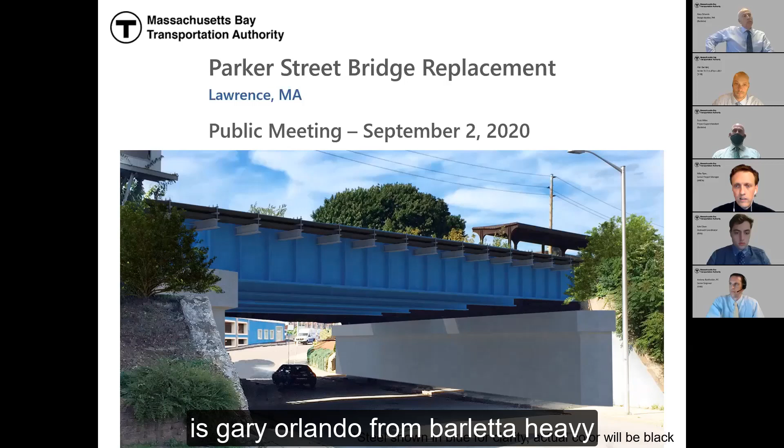Accompanying me as part of this meeting and representing the design build team is Gary Orlando from Barletta Heavy Division, Robert Penfield from VHB, and Andrew Burkholder from VHB, who you'll all hear from.

With that, I'd like to turn it over to Bob Penfield from VHB. Thanks, Mike. I appreciate it.

Right now on the screen that hopefully everyone can see is a slide showing a rough rendering of what the proposed bridge will look like. Just as a point of clarification, the shading of the steel for the bridge, what's called the superstructure, is shaded blue. That's just for clarity, so you can see the contours and intricate pieces of the bridge. But in practice and in actuality, it will be black. That just doesn't show up in the rendering.

As Mike mentioned, there'll be a few of us speaking with you today. Mike Ryan is the MBTA project manager for this project and this program. Gary Orlando is the project manager with Barletta Heavy Division, who is the general contractor constructing this bridge. I'm the design manager with VHB, who is working with Barletta and MBTA as the designer for this project. And then Andrew Burkholder, who's our senior engineer, my counterpart, also at VHB.

So just an outline of what we're going to talk about this afternoon. I'll give you an overview of this design build program. This is one bridge amongst 6 total as part of this program that are being replaced. Then we'll get into some specifics about the Parker Street Bridge, site location, the existing conditions that impacted the design and construction sequencing, the project needs and goals. We'll describe the proposed bridge layout and the design that went into it. We'll talk in detail about the proposed construction staging, and the impacts happening at each phase of construction, and then an overall project schedule. And then we will highlight additional opportunities for public outreach, and take any questions you might have.

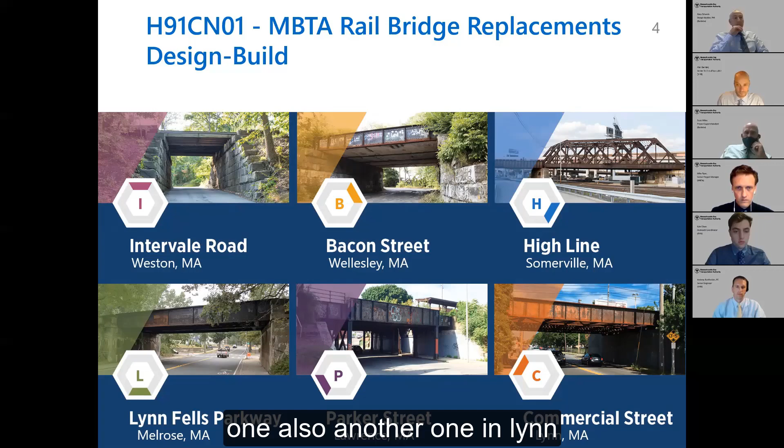The Parker Street Bridge is one project as part of a larger design build program. The MBTA has combined 6 different bridge replacements into a single design build program. We've got a bridge in Weston, Wellesley, one in Somerville, one in Melrose, one in Lawrence, and one in Lynn. They're all located in various locations within the MBTA's commuter rail system. As you can see here, at the top of the page, on the Haverhill line is our Parker Street Bridge, which is what we're here today to talk about.

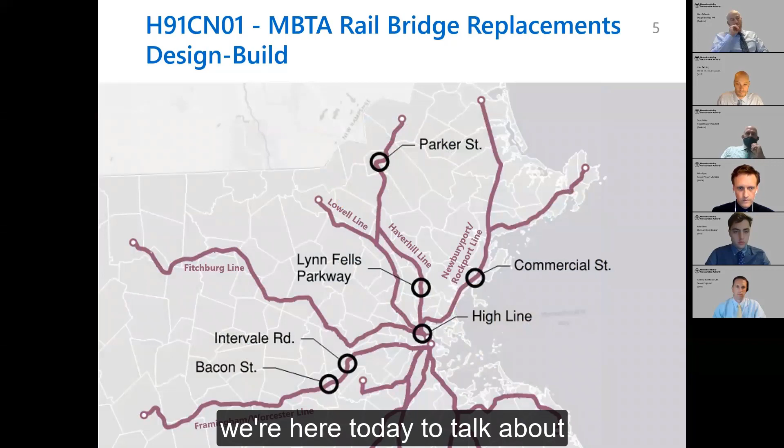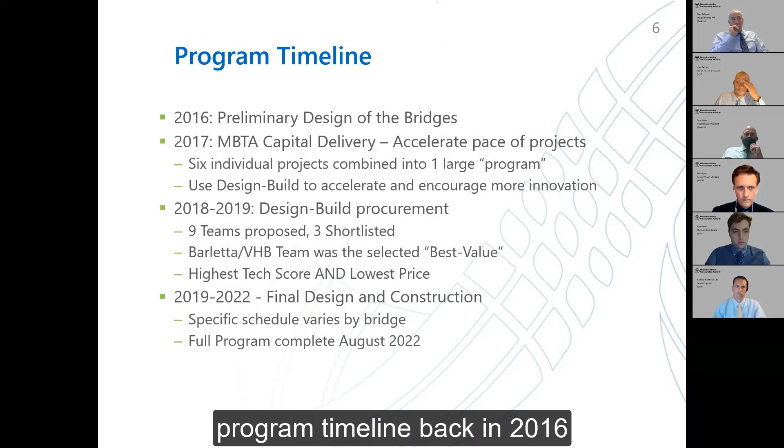To give everyone an idea of the program timeline, back in 2016, the preliminary design of each of these bridges was ongoing. In 2017, the MBTA's Capital Delivery Group was looking to accelerate the pace of their projects and infrastructure improvements. So they decided to take 6 individual projects and combine them into a single large program, and use design build as the contract delivery method to accelerate the project and encourage more innovation. Design build is where a contractor and a designer work together to deliver the project at the same time. During 2018 and 2019 was the procurement for that design build program. 9 teams proposed to win it, 3 were shortlisted, and ultimately the Barletta VHB team was selected as the best value, with the highest tech score and the lowest price.

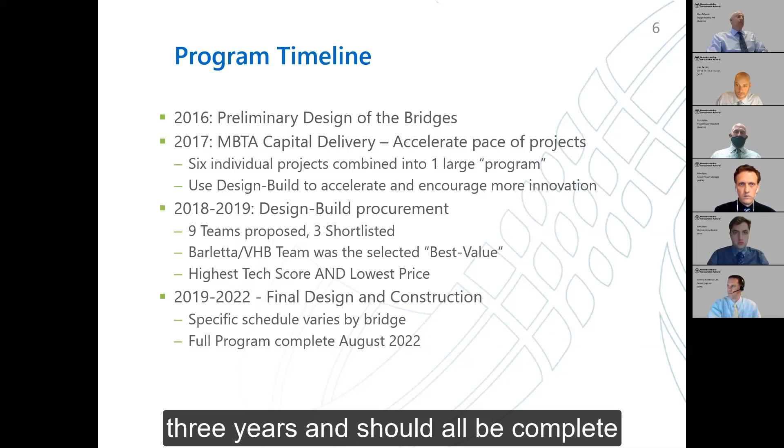From 2019 to 2022 is when we've been progressing the final design and construction for all 6 of these bridges. So while the individual schedule varies for each bridge location, that full program takes approximately 3 years and should all be complete by August of 2022. But we'll get into some more specific details about the schedule for the Parker Street Bridge in just a little while.

So here's a map showing the Parker Street Bridge location relative to the streets of Lawrence. It's carrying the Haverhill line over Parker Street, and it's just south of the Merrimack River.

What we'll do here is zoom in and take a look at some of the existing conditions and site conditions that influence the project.

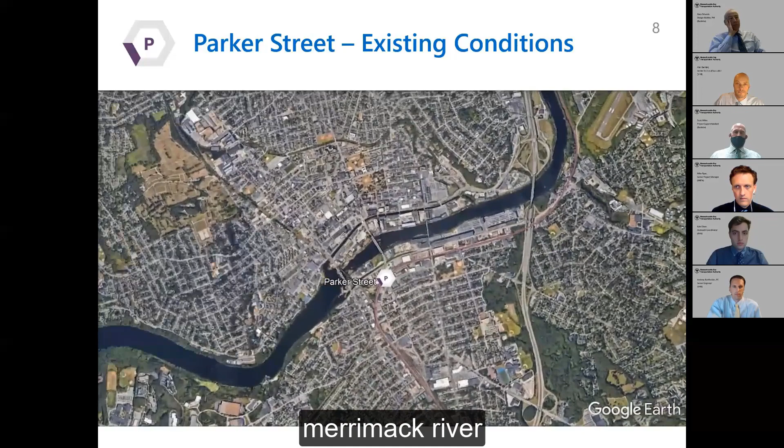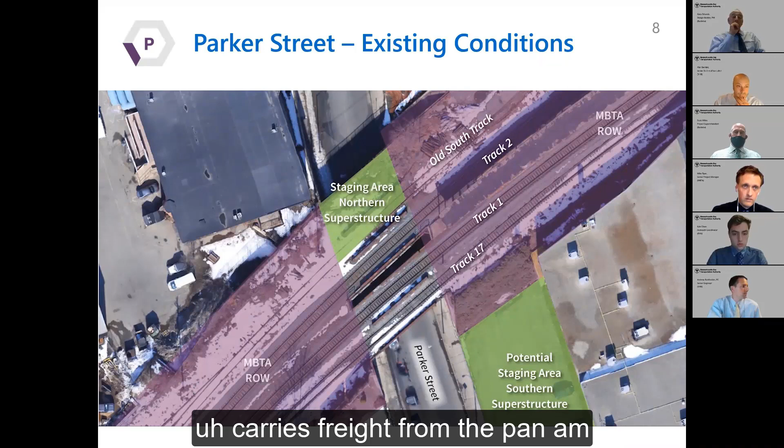Again, we're just south of the Merrimack River. As we zoom in here, you can see the existing bridge, and we've highlighted some different areas. The existing bridge at one point carried 5 different tracks. One has been out of service for quite some time. One is called the Old South track that is no longer being used. Track 1 and Track 2 are the MBTA commuter rail system, and Track 17 carries freight from the Pan Am rail yard just south of this location. You can see the MBTA right-of-way highlighted and shaded in purple, and then we've got areas shaded in green identifying potential staging areas for how we're going to construct the new bridge. We'll get into a lot more detail here in a little bit to clarify all of that.

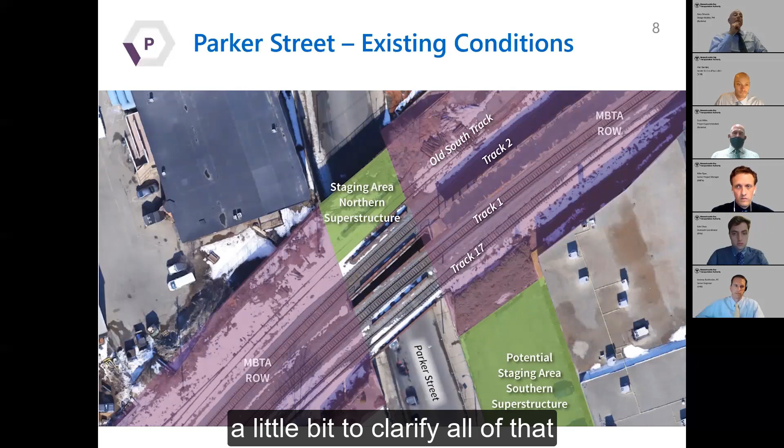At this point, I'm going to turn it over to my counterpart, Andrew Burkholder, who's going to get into some of the more specifics about the bridge.

Thanks, Bob. As Mike mentioned, the bridge was built in 1930. You can see a picture of it here on the right side of the screen. It was originally a 5-track structure, and as Bob mentioned, only 3 of them are active today. The original bridge consisted of a ballasted deck and concrete gravity abutments with a sidewalk on each side. These are approximately 9 feet wide on the west and 7 feet 9 inches on the east. You can also see that these sidewalk widths include the existing piers, the steel columns that exist today in the sidewalk just behind the curb.

Great picture. Utilities on site include signal and fiber optic that are carried by the bridge. Overhead, we have PTC wires, which are positive train control wires, and power is also located on overhead wires above the bridge. The railroad operations include 32 commuter trains that use this bridge on any given weekday, and 12 trains cross the bridge each day of the weekend. There's also freight rail on track 17, as Bob mentioned.

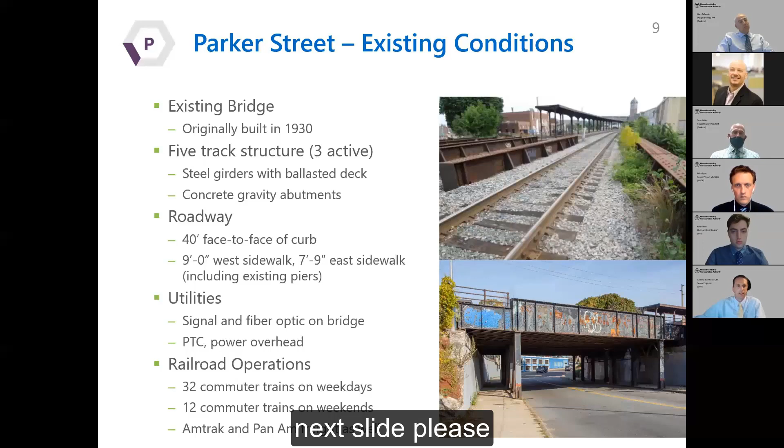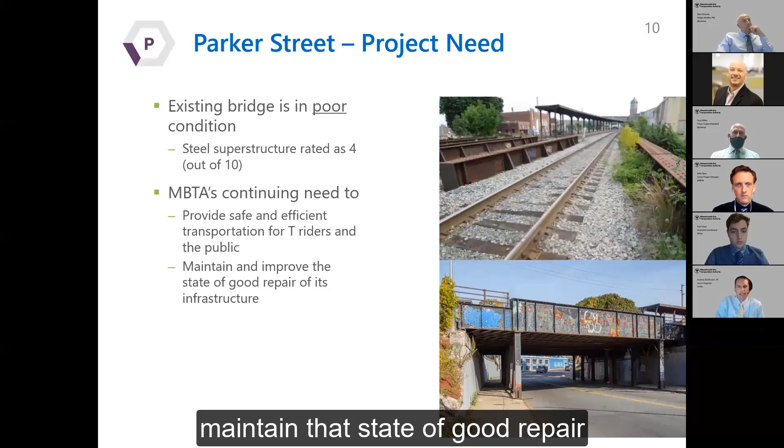So why do we need to do this project? The answer is that the existing bridge is in poor condition. The steel superstructure is rated a 4 out of 10 on the last inspection report. For the MBTA's continuing need to provide a safe and efficient transportation system, we need to replace this bridge to maintain that state of good repair for the T's infrastructure.

So the goals for this project: we want to restore that state of good repair for the T's system. The replacement structure needs to be one that's resilient and provides a minimum of 75 years of expected service life. We want to replace this while minimizing impacts to abutters, the commuter rail riders, users of Parker Street, and also the freight operators in the area.

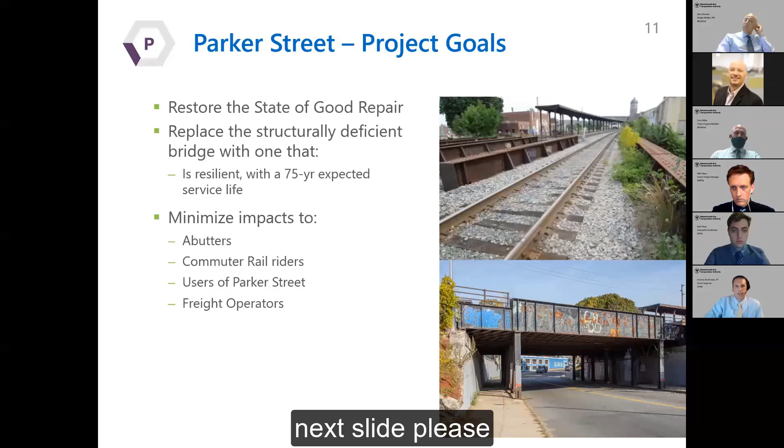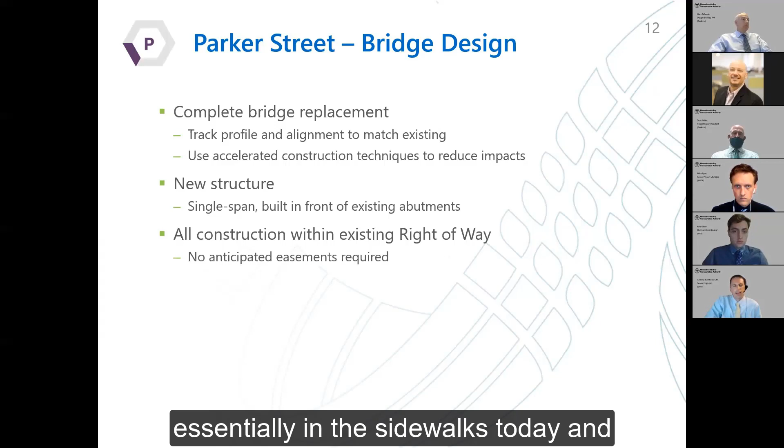So let's get into the design a little bit and show you how we're going to do that. This is a complete bridge replacement. The track profile and alignment for all 4 tracks going back on this bridge will not be changed—same horizontal alignment, we're not raising or lowering anything. We are going to use accelerated bridge construction techniques to achieve that goal of reducing impacts to the traveling public and the abutters in the area. The new structure will be a single span and built in front of the existing abutments, which will make more sense in a minute when I show a graphic. One benefit here is we are getting rid of those steel piers that are essentially in the sidewalks today. And all construction is within the existing right-of-way.

This graphic at the bottom of the screen shows the bridge cut in half, as if you were standing in the middle of Parker Street. A couple things to point out: the existing abutments are shown in the brownish color on each end. We plan to come in front of those abutments and install micropiles—steel round tubes that are drilled down into the ground and into the rock. These will support the new bridge, and you can see them extending at the bottom of the page.

We'll then cast new concrete in front of the existing abutments, and one abutment will have a tieback to resist some longitudinal loads. The vertical clearance that we will provide will be 14 feet 6 inches over Parker Street.

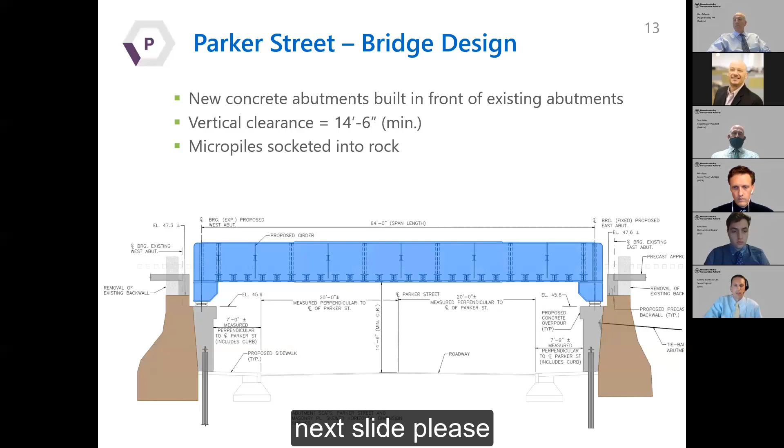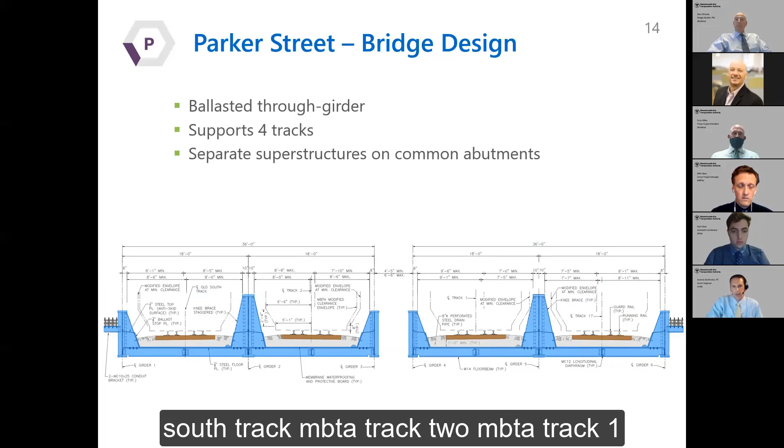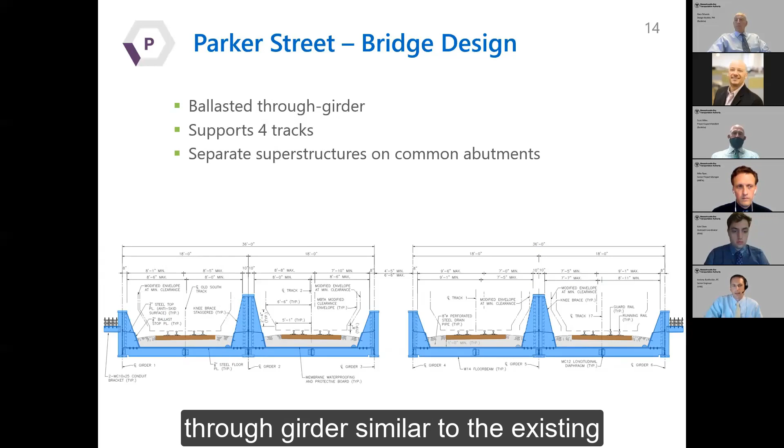The graphic here at the bottom of this slide is if we were standing up at track level, again able to slice the bridge in half. You can see the new structure will support 4 tracks. Moving left to right: the old south track, MBTA track 2, MBTA track 1, and then track 17, the freight track. There are 2 separate steel superstructures, with a common abutment at each end supporting these 4 tracks. The construction will be a ballasted through girder, similar to the existing bridge.

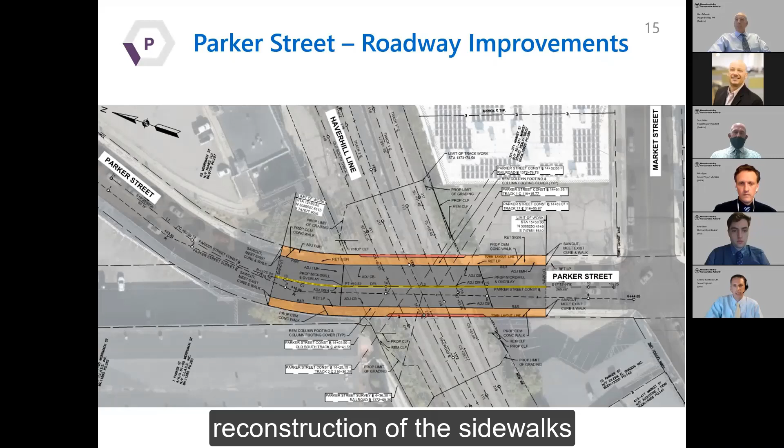This view is an overhead view of the area of Parker Street right below the bridge, intended to show the limits of repaving of Parker Street and reconstruction of the sidewalks as part of this project. The orange shading shows the limits of the reconstructed sidewalk, which coincides with the limits of repaving of Parker Street at the end of the project.

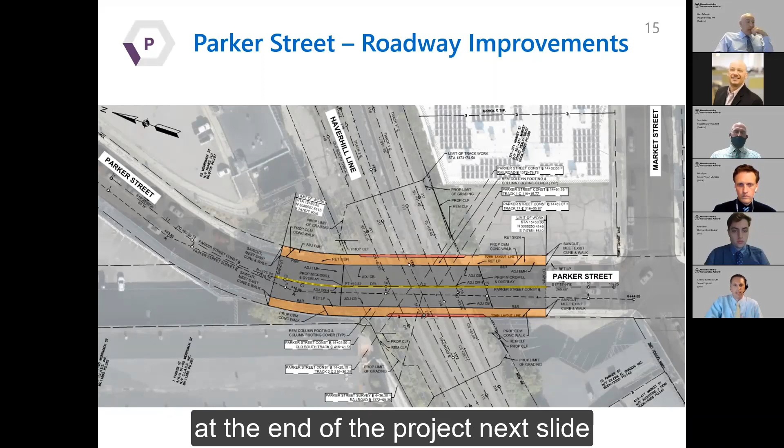Once this work zone is set up, we are able to go beneath the bridge and, using some low headroom equipment, install the tiebacks at the east abutment.

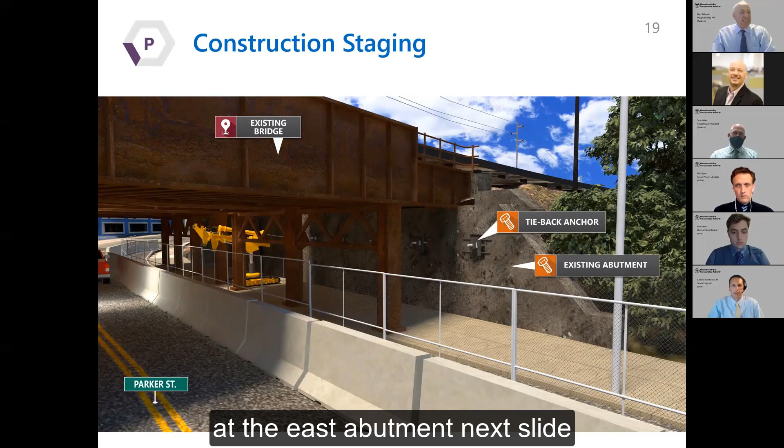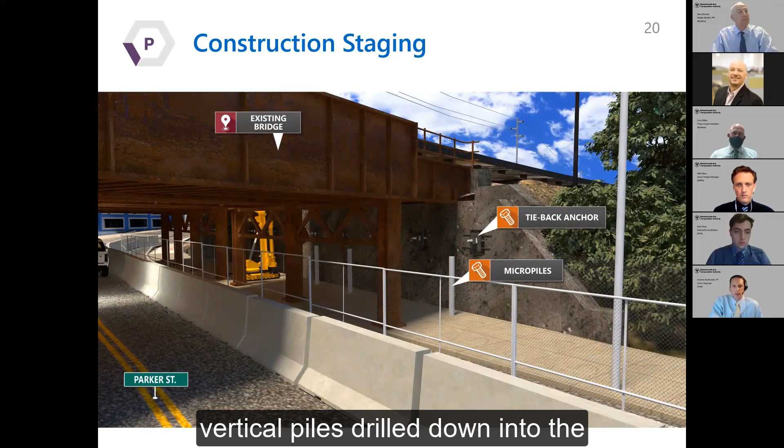The next step is to install the micropiles—the vertical piles drilled down into the rock. The low headroom equipment is able to operate under the existing bridge and install these without disrupting any commuter rail traffic.

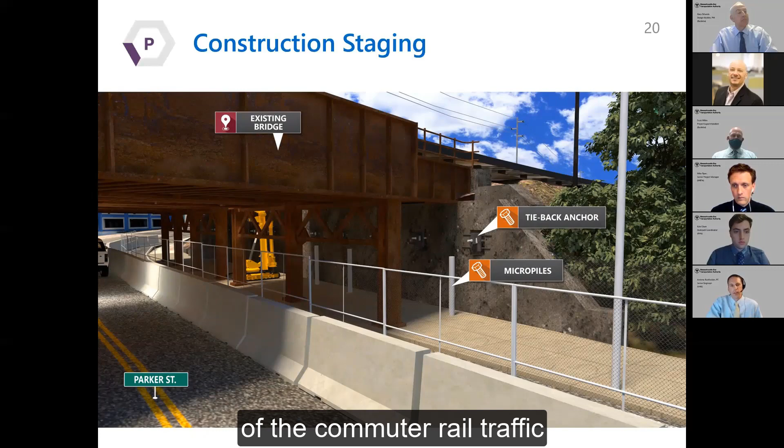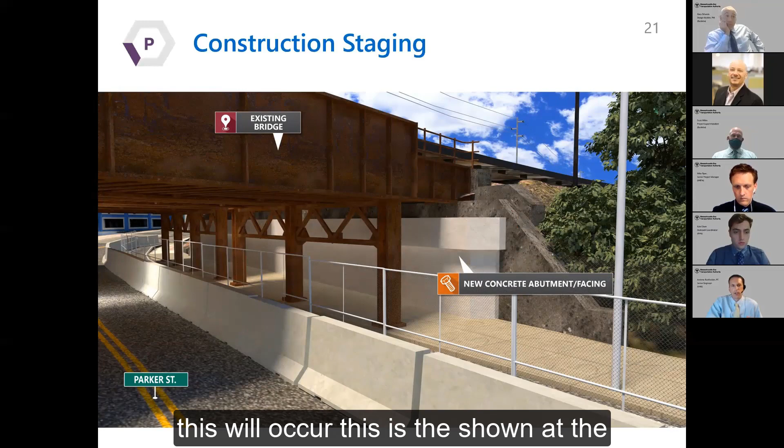The final step at the abutment is to cast the new concrete in front of the existing one. This is shown at the east abutment; the same process, minus the tiebacks, will happen at the west abutment. And now we're back to the overhead view showing that new abutment on each side.

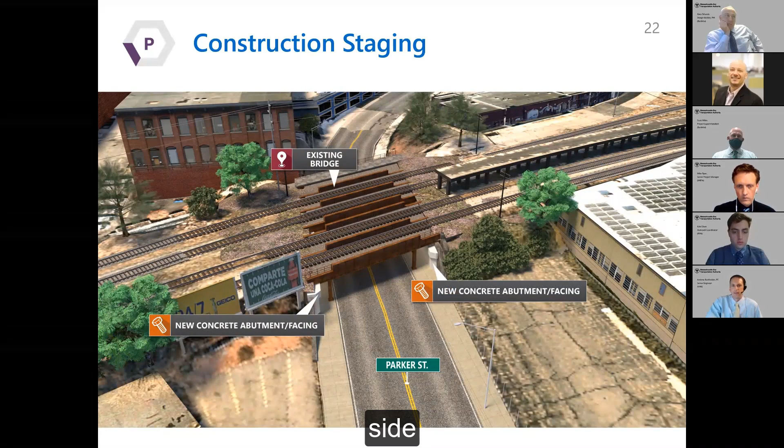Our next step is to remove a portion of the existing structure. As mentioned, there's two abandoned tracks not in service, so we're going to remove the portion of the existing bridge that supports those tracks. This gives us room to assemble a new superstructure next to the existing one over Parker Street. This slide shows closing those 2 tracks and removing a portion of the existing structure. During this time, Parker Street would be closed over a weekend, to allow crane access and for safety reasons because of the overhead work.

During that weekend, the existing portion of the bridge would be removed. We would also be excavating and installing some precast concrete approach slabs in preparation for the new superstructure.

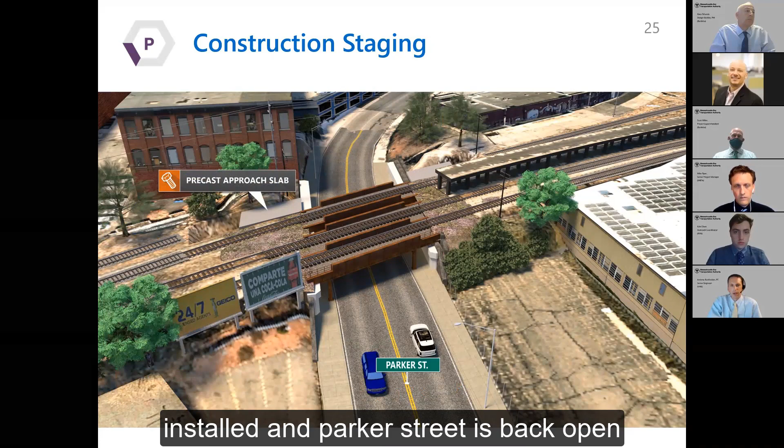All right, so now those slabs are installed and Parker Street is back open at the end of the weekend. All right, next slide, please.

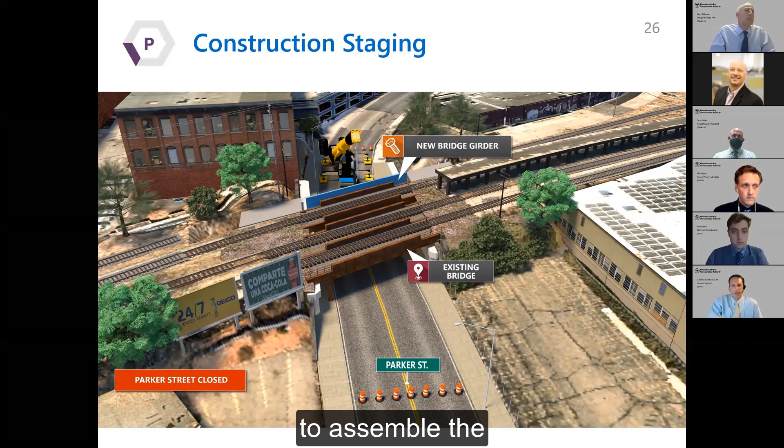So our next step now is to assemble the northern superstructure next to the existing bridge. We need to close Parker Street for a weekend again, for crane access and because of overhead work. But this closure allows us to assemble the new superstructure next to the existing.

So then this next step involves a weekend shutdown of both Parker Street and the commuter rail line. This would be what we might call a full shutdown, tracks and Parker Street below. These weekend shutdowns would typically be late Friday to early Monday timeframe, and this would allow us to excavate behind the abutments, install the precast approach slabs, and remove the remaining portion of the existing northern superstructure.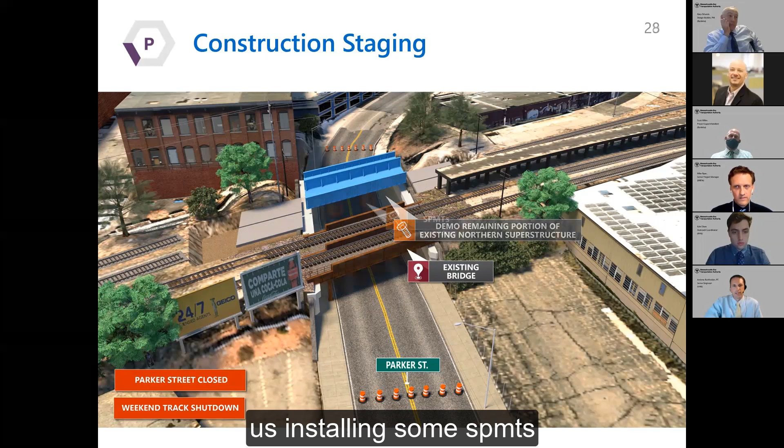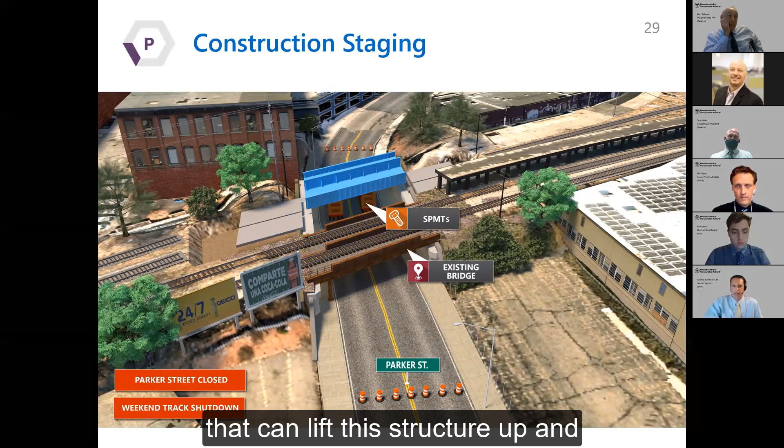If you go to the next slide, it'll show us installing some SPMTs. This stands for self-propelled modular transporter, and you can think of it as a big flatbed with lots of wheels that can lift this structure up and drive it into place.

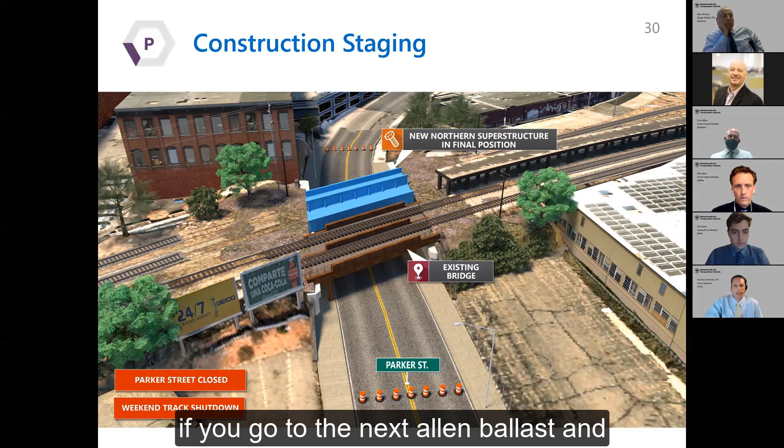If you go to the next slide, that'll show this bridge is now moved into its final location, again all on the same weekend. And then the next step will be to install ballast and track. Ballast and track there on track 2, and the bridge is then reopened and Parker Street is reopened at the end of the weekend.

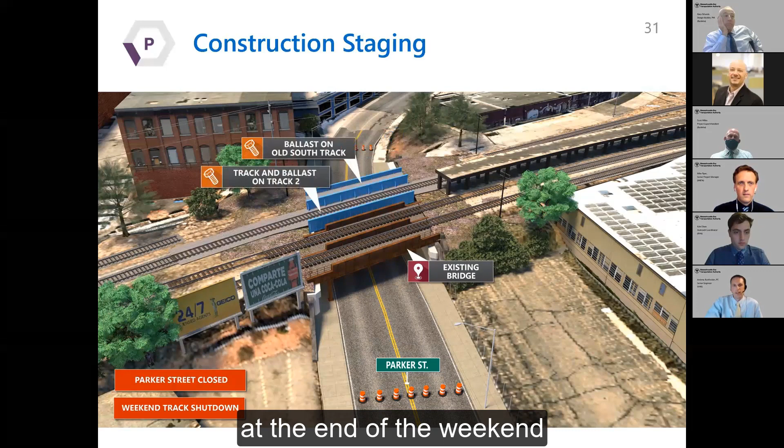Next slide, please, which is shown here. So at this point, we have completed the substructure and we have half of the new superstructure. The new steel beams are in place. So the next step is to construct the southern half of the bridge.

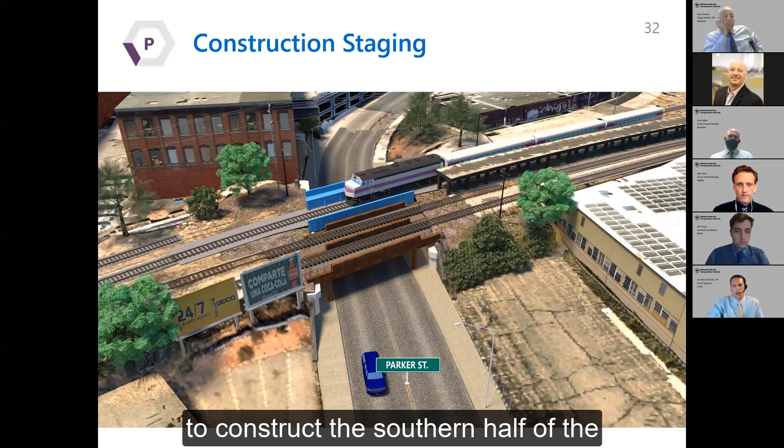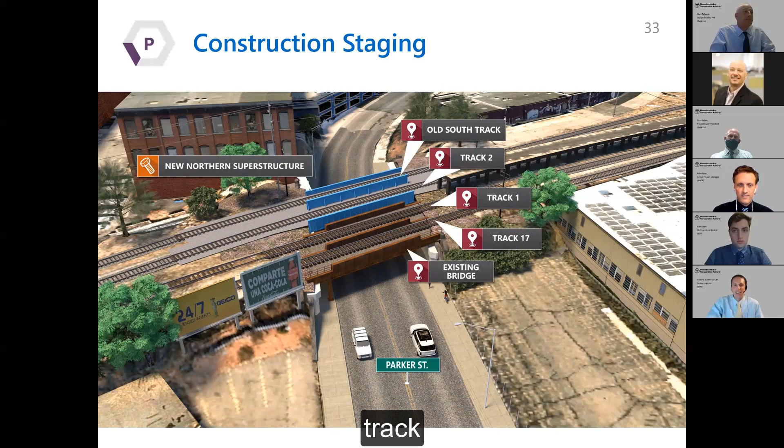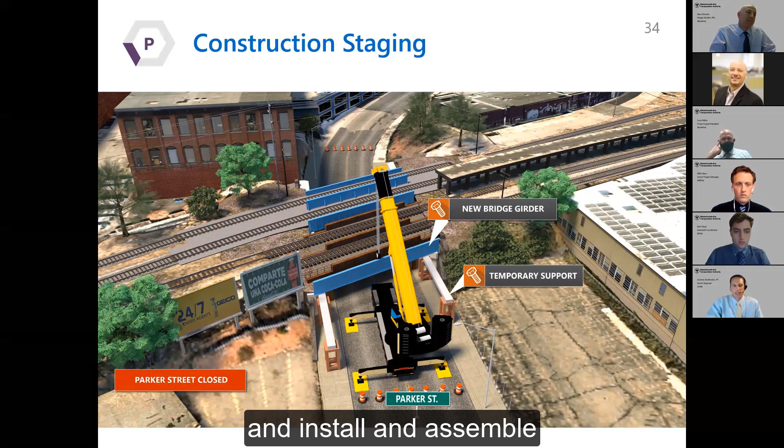So similar to what we did on the northern side of the bridge, we need to assemble the new superstructure next to the existing over Parker Street. So again, over a weekend closure of Parker Street, we would install some temporary shoring and install and assemble the new superstructure next to the existing.

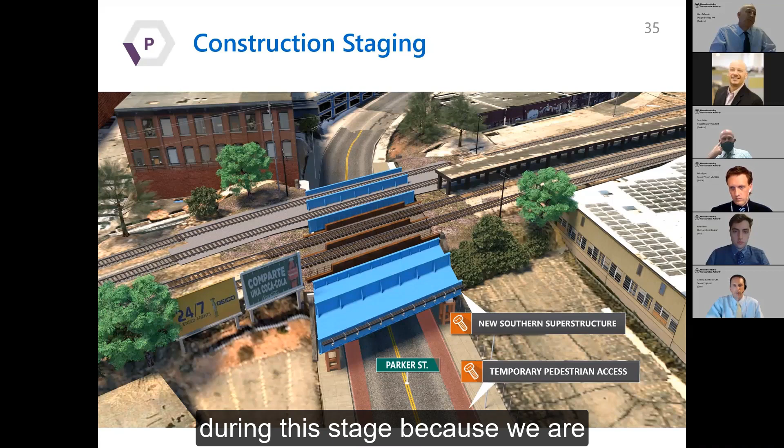Next, please. So this shows that new superstructure in place, assembled over Parker Street, and we would need to provide some temporary pedestrian access during this stage because we are planning to take some of the sidewalk with shoring towers to support this new superstructure.

Next slide, please. So now these activities start on our second full weekend shutdown, again shutting down all of the tracks and shutting down Parker Street for the weekend. This allows us to remove the remaining portion of the southern bridge, as shown here.

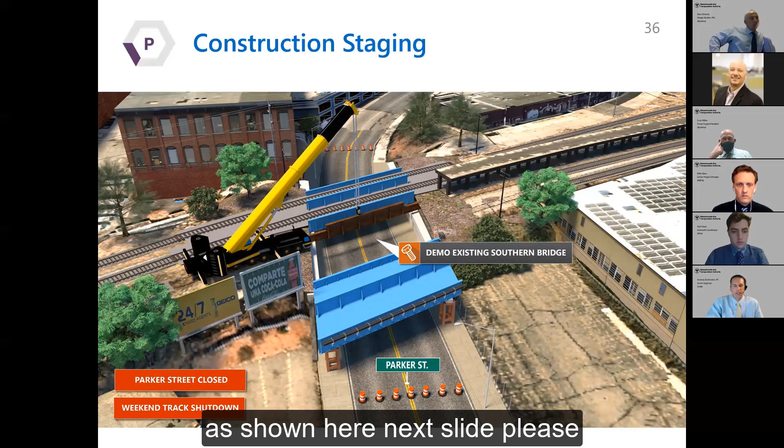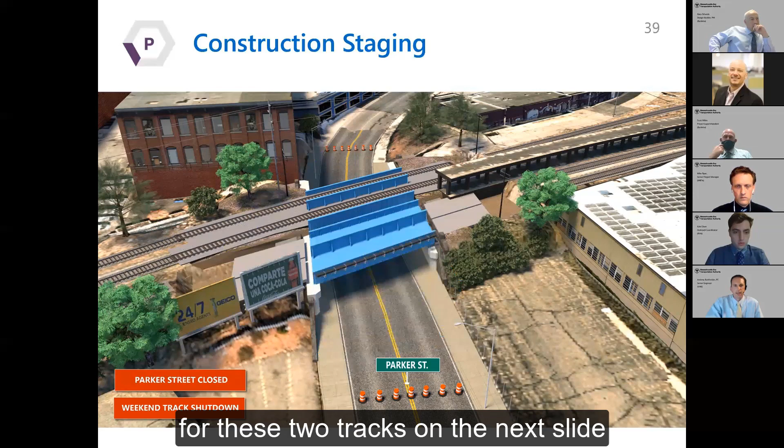Next slide, please. We'll install the precast approach slabs at each abutment. Next slide. Install the SPMTs again. Next slide, and then move it into place on the new abutments, and then finally install the ballast and track for these two tracks on the next slide. And at the end of the weekend, Parker Street and all tracks are back open for service.

Final step of the project is to repave Parker Street and to reconstruct the sidewalks to the limits that I showed on a previous slide. And then at that point, we are done with this particular bridge site.

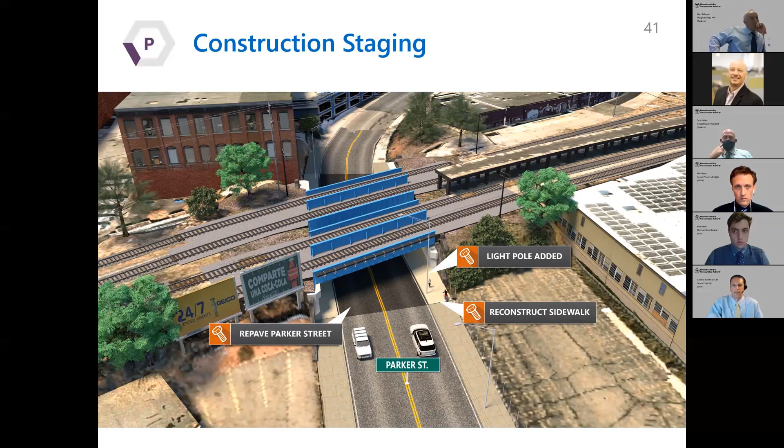Next slide. I think Bob is going to go into some of the detours that are going to occur during those outages I mentioned. All right, thanks, Andrew.

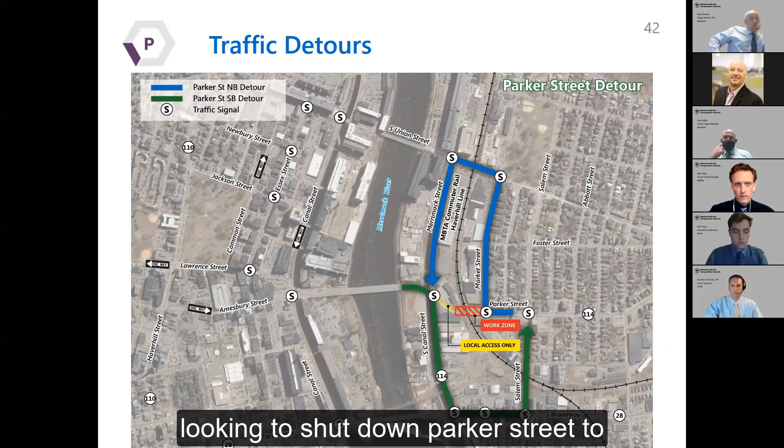As Andrew mentioned, there's essentially 2 weekends where we would be looking to shut down commuter rail service, and there's those 2 weekends and a couple other small instances where we would be looking to shut down Parker Street to vehicular traffic and pedestrian traffic as well.

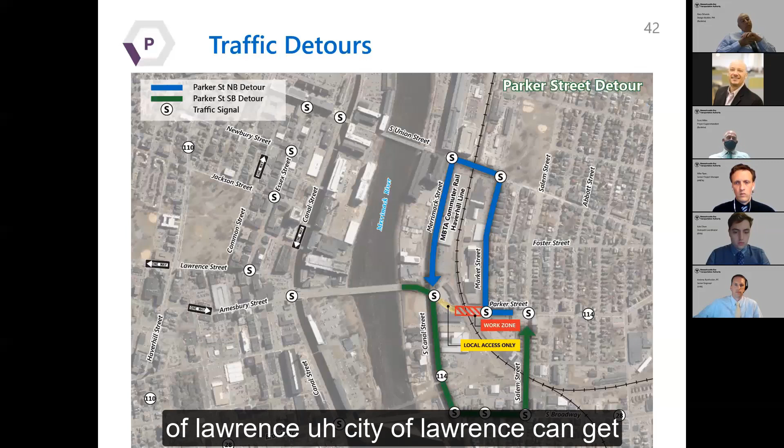But when we do implement the detour onto Parker Street, we've created a detour, which will be signed with variable message boards all up at least 2 weeks in advance of any of these shutdowns, so that commuters using the street network of Lawrence, the city of Lawrence, can get around that bridge site.

So if you were to travel north on Parker Street and approaching the bridge from the south, you would have a detour to take a right onto Market Street, a left on South Union Street, and then a left onto Merrimack Street.

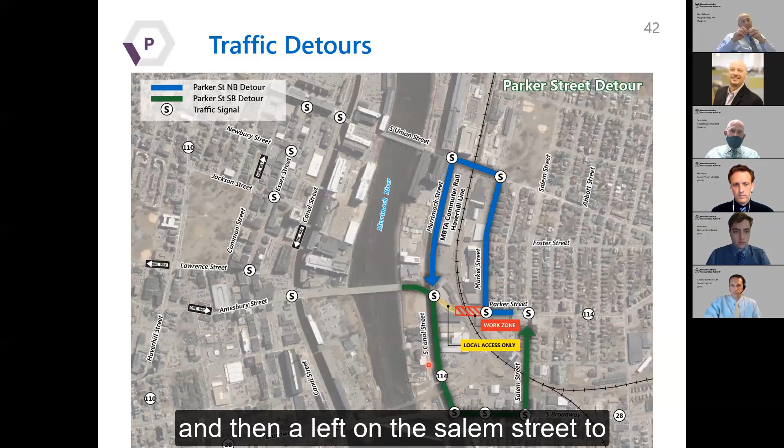It's a single block detour essentially to get around the site. If you were traveling south on Parker Street, just going across the Merrimack River, you'd hit a right onto South Canal Street, a left onto South Broadway, and then a left onto Salem Street to get yourself around Parker Street.

But again, these are going to be only for those select weekends. Next slide.

So we're about one year away from this all being complete. Next slide.